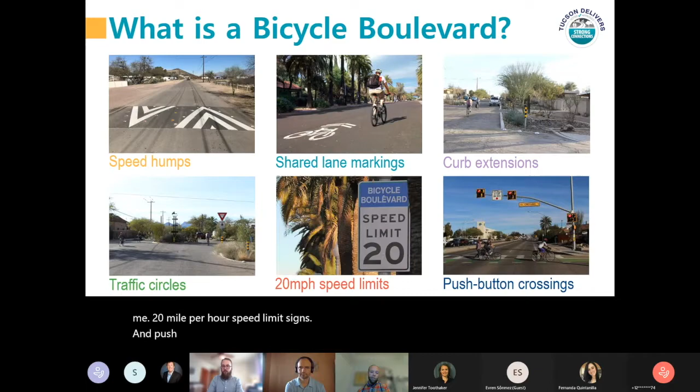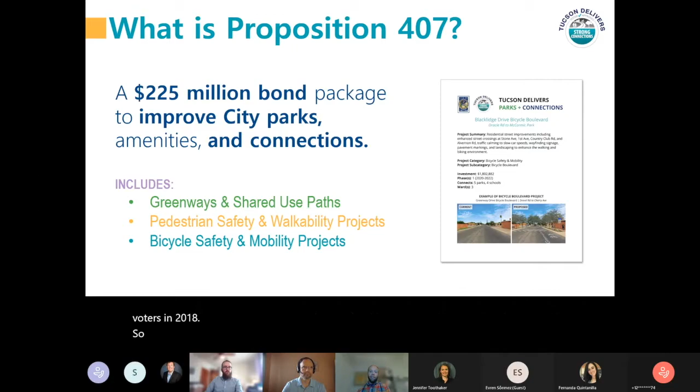Proposition 407 is the funding mechanism for this project, and it was a bond approved by voters in 2018. So that's what's making this project possible from a financial standpoint.

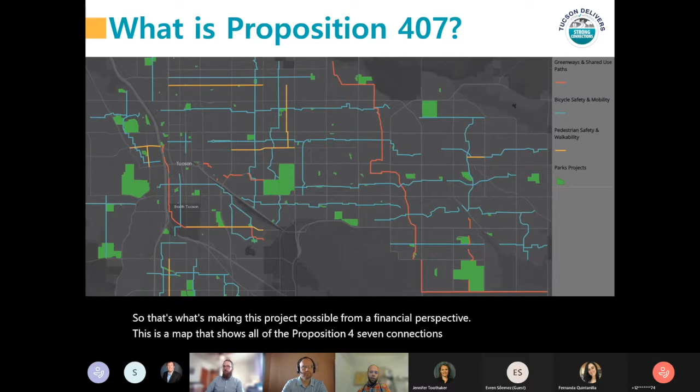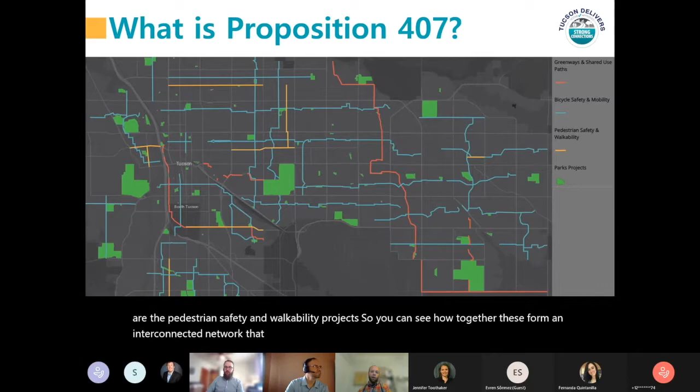This is a map that shows all of the Proposition 407 connections projects. All the blue lines are the bicycle safety and mobility projects. The orangish red lines are the greenways and shared use path, and the yellowish orange lines are the pedestrian safety and walkability projects. So you can see how together these form an interconnected network that is going to help people get across town and access destinations.

Got a lot of comments as well about the pavement quality, some comments about cut-through traffic, and then other ones about trees, flooding, sidewalks, litter, and crime. Those were less common, but still a good number of folks had some concerns about those issues as well.

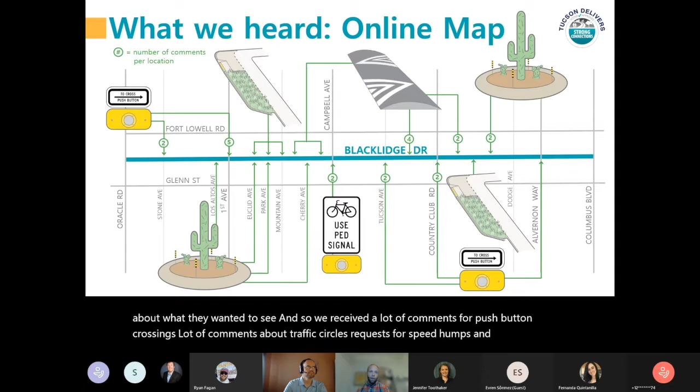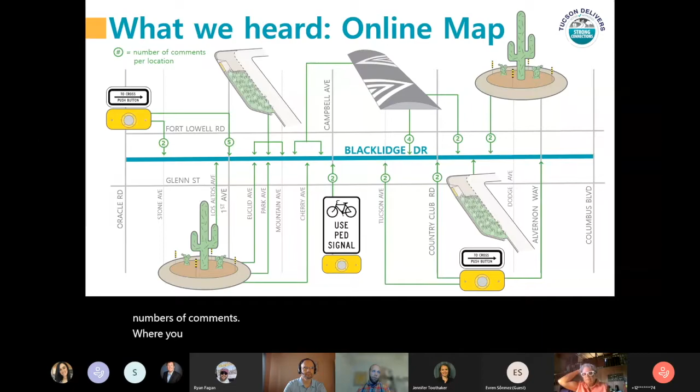The numbers that you see inside the little circles on this slide are the numbers of comments - for example, there's a request for a push button crossing at First Avenue, 5 different people suggested that would be something they'd like to see. So that's what those numbers mean.

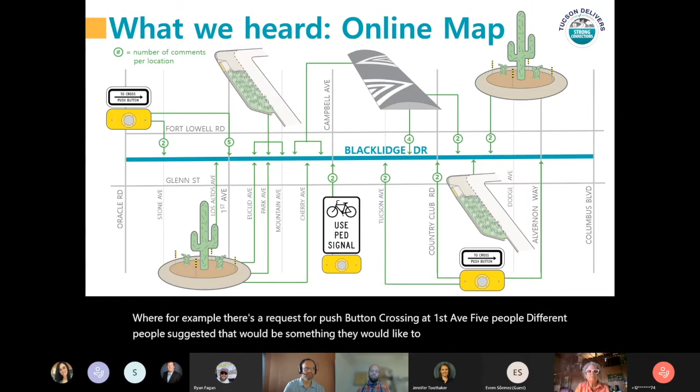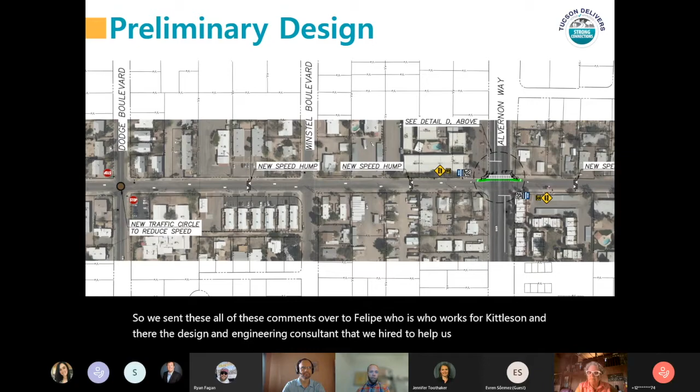So we sent all of these comments over to Felipe, who works for Kittelson, the design and engineering consultant we hired to help us design this project. He and his team reviewed all of your comments and came up with a preliminary design to incorporate what we heard from you all.

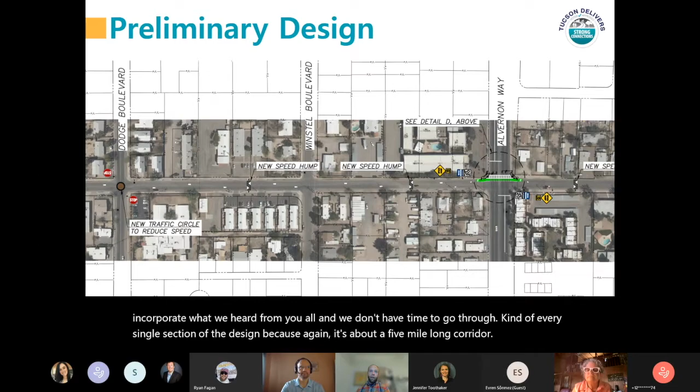We don't have time to go through every single section of the design, since it's about a 5-mile long corridor. But this is available on the website, so I encourage you to go download it. There's a slide later about how to access the website, but if you just Google Blacklidge Bicycle Boulevard, you'll find it.

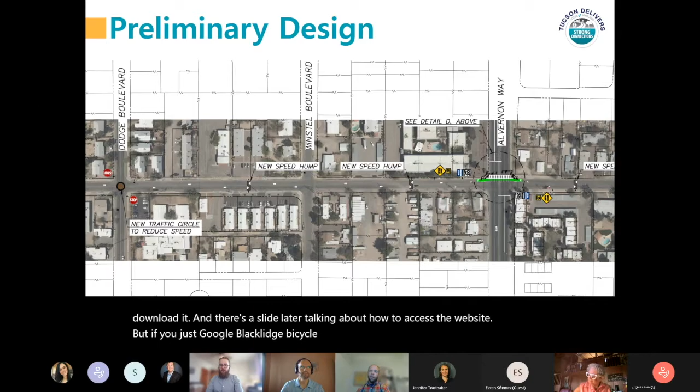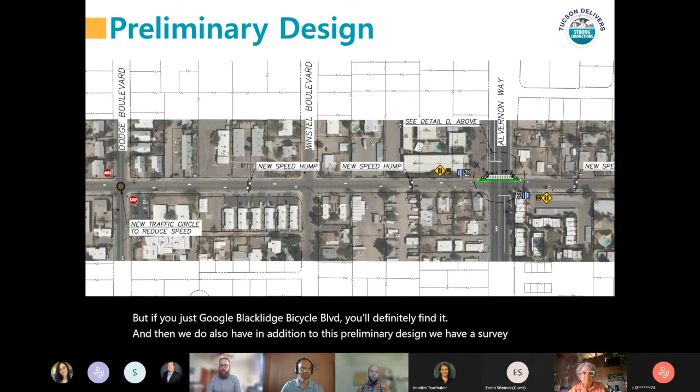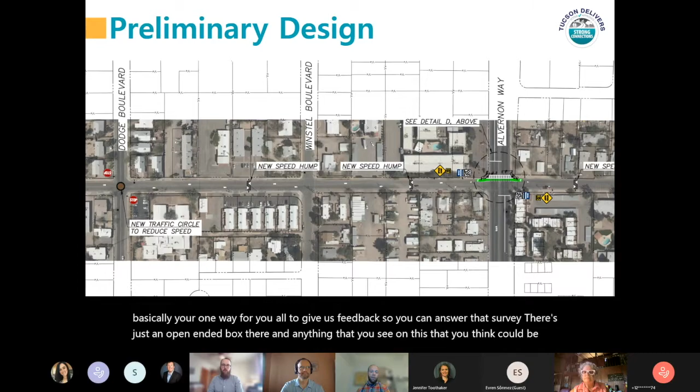In addition to this preliminary design, we also have a survey as one way for you all to give us feedback. There's an open-ended box, and anything you see that you think could be changed to work better, let us know. You can also call me or email me. I'm around, and I'd love to have conversations with you about what you'd like to see along the corridor.

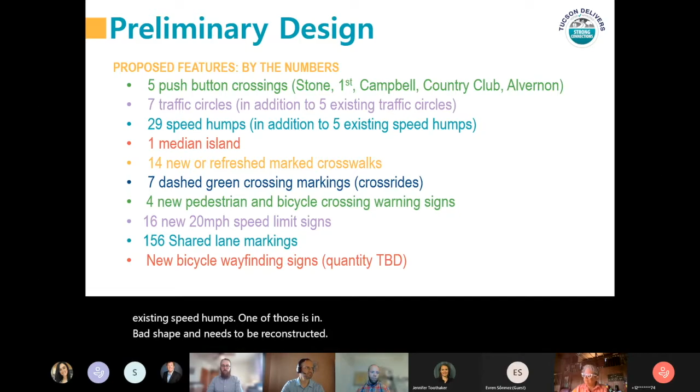Since we can't go through everything bit by bit, I'll summarize some features here. There are 5 push-button crossings at Stone, First Avenue, Campbell, Country Club, and Alvernon. There are 7 proposed traffic circles in addition to 5 existing ones, and 29 speed humps being proposed in addition to 5 existing ones. One of those existing humps is in bad shape and needs to be reconstructed.

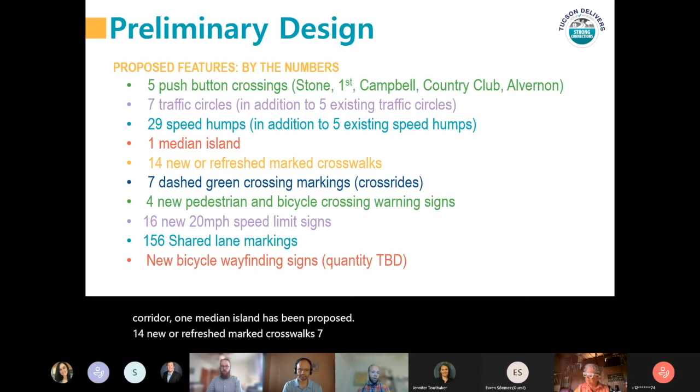One median island has been proposed, along with 14 new or refreshed marked crosswalks, and 7 dashed green crossing markings, or cross rides as they're sometimes called. There will also be 4 new pedestrian bicycle crossing warning signs, 16 20-mile-an-hour speed limit signs, 156 shared lane markings, and bicycle wayfinding signs. We don't know how many of those there'll be yet, since that comes later, but it's part of the design.

I wanted to share with you a couple of options for Blacklidge at First Avenue. This is one of the locations where we're considering experimenting with a new treatment that we think has the possibility to work a little better than what we've done in the past, although we want to get your feedback.

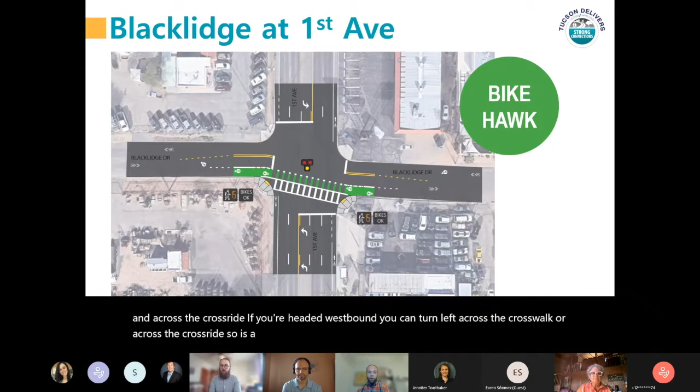I want to point out there are no turning restrictions on vehicle movements in this option. Cars can drive straight through on Blacklidge. If headed eastbound, you can turn right across the crosswalk and cross ride. If headed westbound, you can turn left across the crosswalk or cross ride. So it's a bit more convenient, arguably, for cars, but there are some conflicts with turning vehicles and people walking and biking in this option.

The second option is what we're calling a mini toucan. This is similar to a toucan design the city of Tucson has installed in other locations, including 5th and Euclid, if you're familiar with that. It's very similar, except instead of a short section of 2-way bike lane, it's just a 1-way bike lane. But in this option, bikes don't have to cross over to one side of the street.

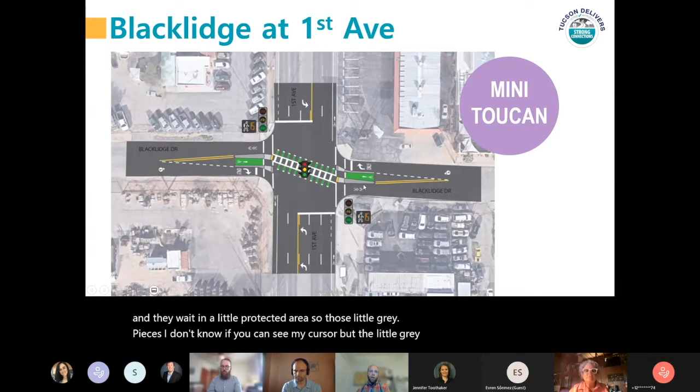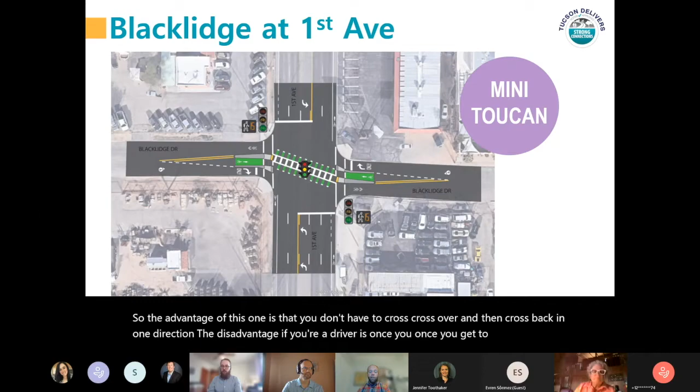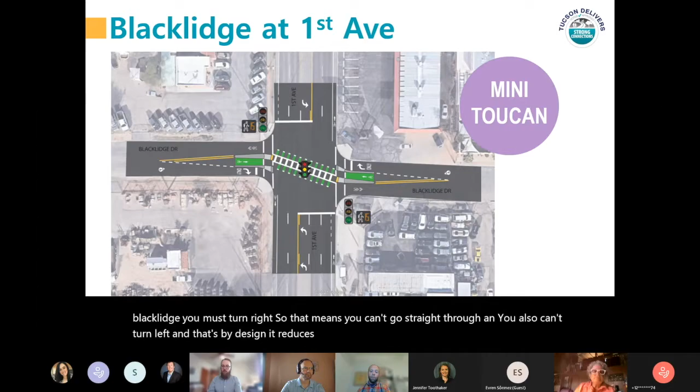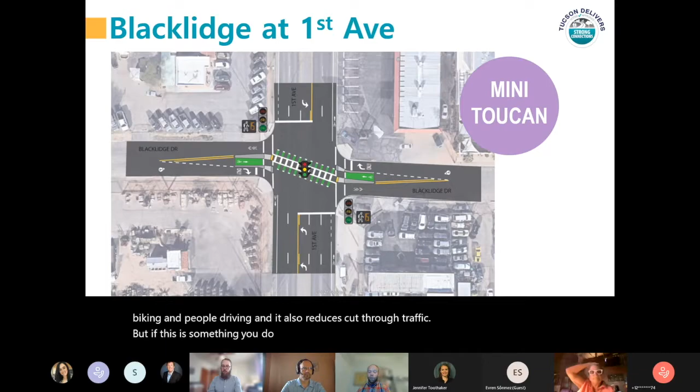The advantage of this one is that you don't have to cross over and then cross back in one direction. The disadvantage, if you're a driver, is once you get to First Avenue on Blacklidge, you must turn right. You can't go straight through, and you also can't turn left. And that's by design. It reduces the conflicts between people walking, biking, and driving, and it also reduces cut-through traffic. But if this is something you do frequently, you may not love this option.

Okay, I'm going to pause there because I just talked for a long time. I'm hoping that we can get a sense of what people prefer here. In a minute, I'm going to ask you to raise your hand for one of the options, but I wanted to stop and see if anybody had any questions before we take the poll.

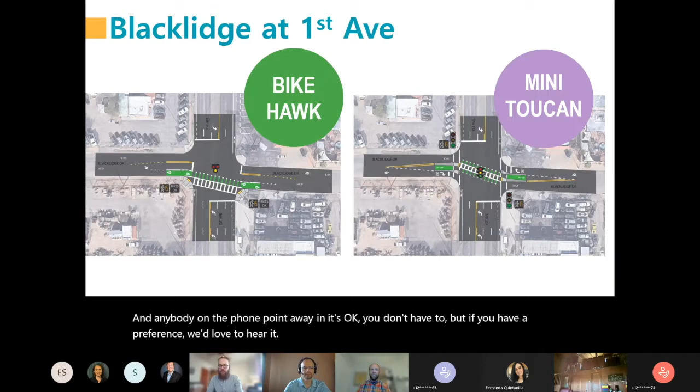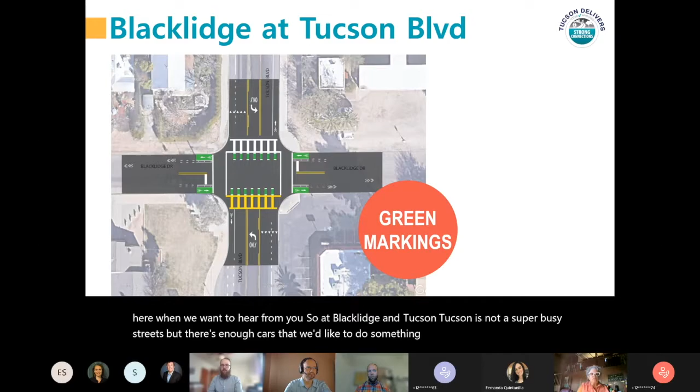All right, let's move on to the next intersection. There's only two of these, two intersections. One, instead of having two options, has three options. I just wanted to walk you through them quickly because we're not sure what's going to work best here, and we want to hear from you. So at Blacklidge and Tucson Boulevard, Tucson is not a super busy street, but there's enough cars that we'd like to do something more than just have a stop sign there. So we have three options. The first one is a short section of bike lane and green crossing markings, and this just alerts drivers to the fact that this is a bike crossing and that they should expect bikes.

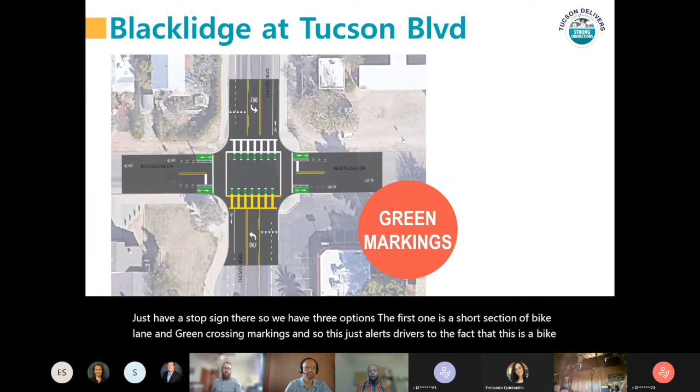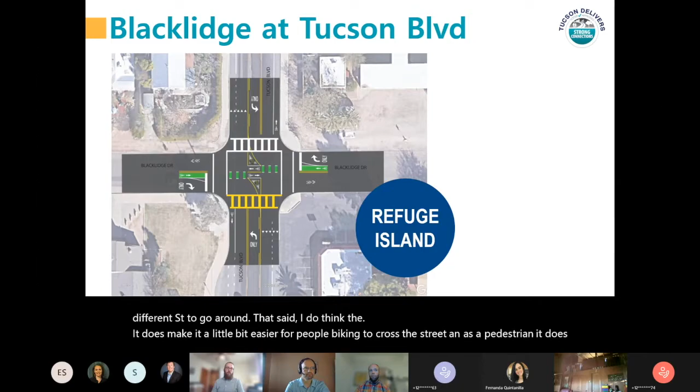I do want to point out, if you're driving here, similar to the mini Toucan option at First Avenue and Blacklidge, you would have to turn right here as a driver. You can't go through and you can't turn left, so that might be a disadvantage. We did hear from some folks at the in-person event that they drive this daily, and it would be a little inconvenient for them to have to turn and use a different street to go around. That said, I do think it makes it a little easier for people biking to cross the street, and as a pedestrian it does give you a little bit of a refuge as well. So that's the second option.

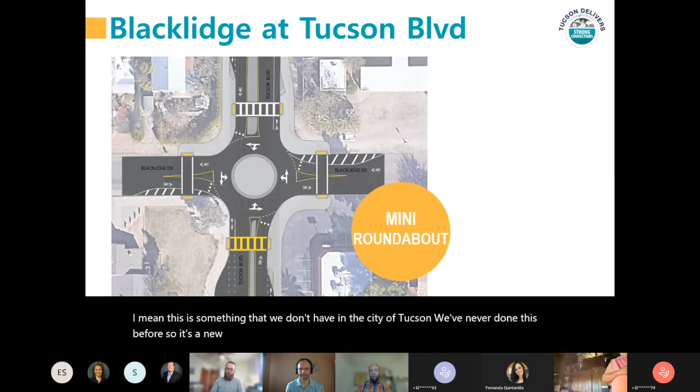The third option kind of surprised us, to be honest — at the in-person event, this was by far the most popular option. This is something we don't have in the city of Tucson; we've never done this before, so it's a new idea. It's bigger than the traffic circles you may have seen on other streets, and it really functions like a true roundabout, just about half the size of a conventional one.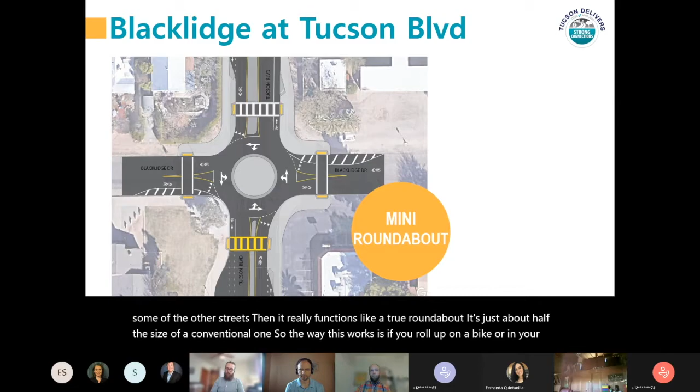The way this works is, if you roll up on a bike or in your car, you have to yield to people already in the roundabout. If you're in that circular area, you get to go, and if you're not in the circular area yet, you have to wait. This will slow people down — it has a design speed of about 15 miles an hour, so there will be warning signs that say slow down to 15 miles an hour, and the geometric design really encourages people to do that as well.

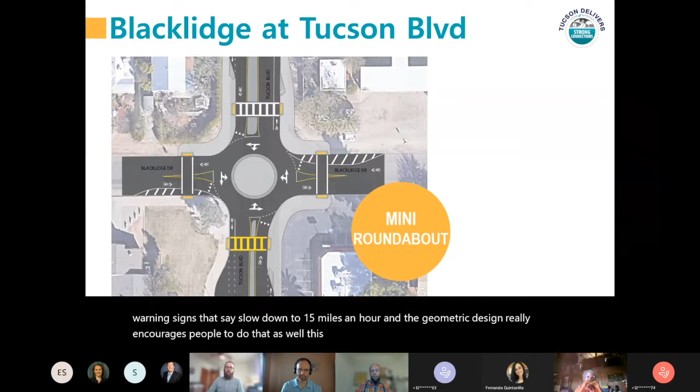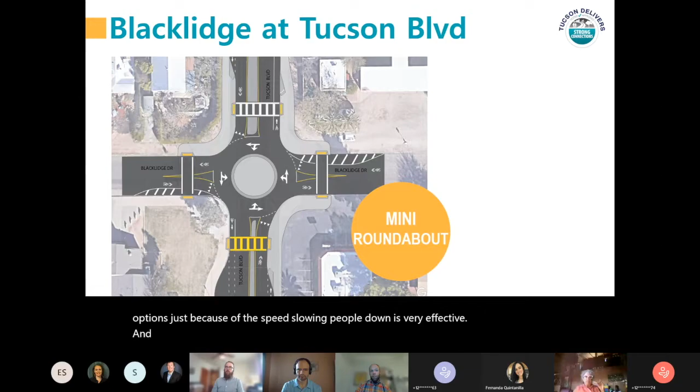This has probably the biggest safety benefits of all the options, just because of the speed. Slowing people down is very effective, and it really does reduce crashes for all modes. The crosswalks for pedestrians are set back, meaning you have to walk a little further out of your way, but having them set back like that is a big safety benefit.

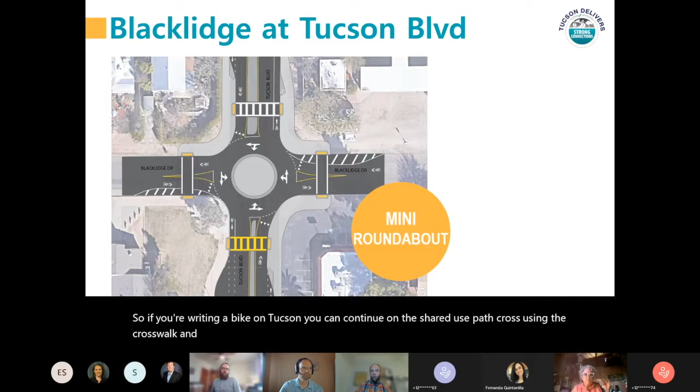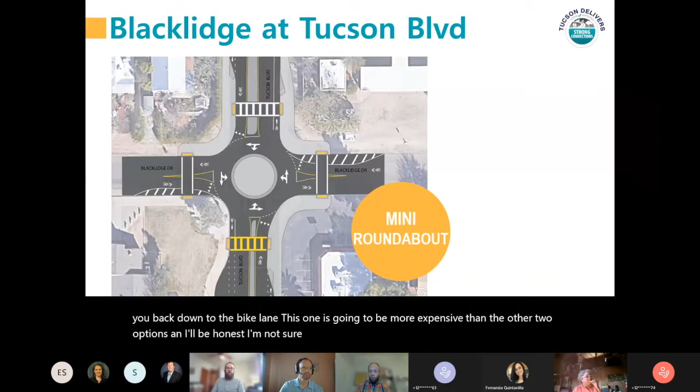You'll notice too that the bike lanes on Tucson Boulevard have some little ramps that take you up onto a shared use path. So if you're riding a bike on Tucson, you can continue on the shared use path, cross using the crosswalk, and then continue, with another little ramp on the other side that takes you back down to the bike lane. This option is going to be more expensive than the other two. I'll be honest, I'm not sure if we can afford to construct this, but we really just wanted to put it out here and see if people liked the idea before we took it any further.

All right, so these are the three options. Are there any questions about the green marking option, the refuge island option, or the mini roundabout option before we take a quick poll? I'll take that as a no. Ryan, are there any questions in the chat box? There are not, at this time.

All right, if you like the green markings option, which is the first one I showed, raise your virtual hand now if that's your favorite. Feel free to unmute and chime in on the phone too. Ryan, how many do we have for that? We do not have any hands raised. No votes. All right.

What about the refuge island option? That was the second one, with the little triangular islands where cars have to turn right, but bikes have a little place to wait. I'll vote for that one. Okay, one vote for refuge island.

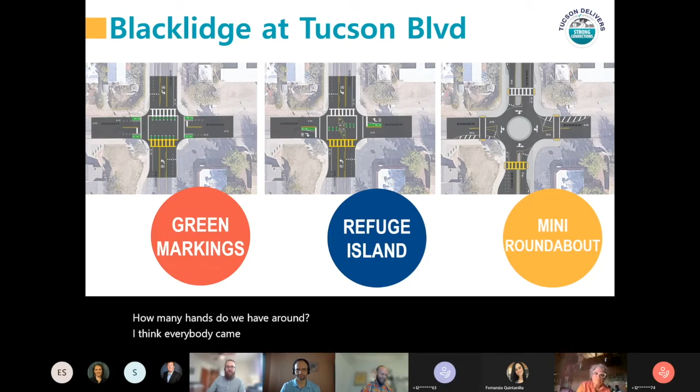Okay, last one: the mini roundabout. Anybody want to vote for that one?

Any hands, Ryan? Yes, we have two hands raised. All right, look at that. Mini roundabout wins again.

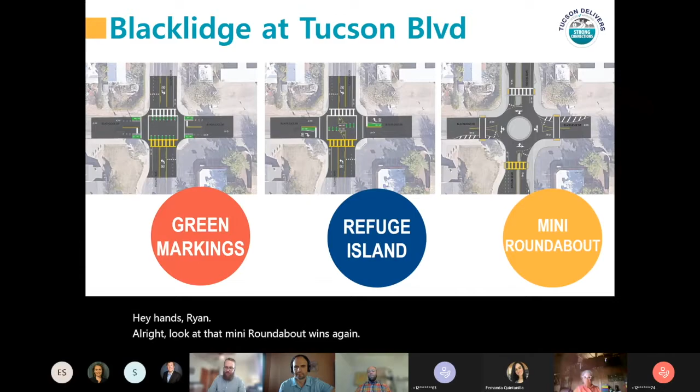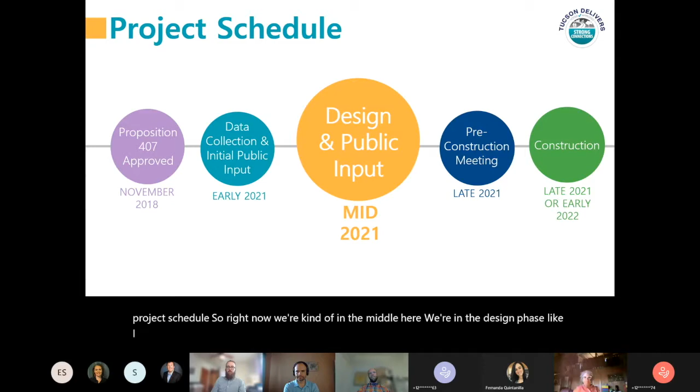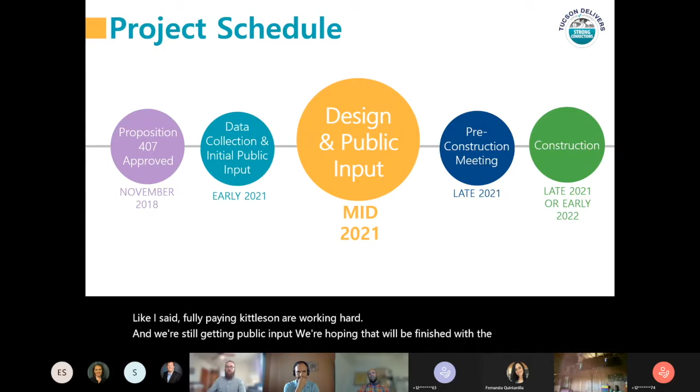Very cool. Okay, I'm almost done with this presentation. I just wanted to give an update on the project schedule. Right now we're kind of in the middle, in the design phase. Felipe and Kittelson are working hard, and we're still getting public input. We're hoping to finish the design towards the end of the year, and we hope to go to construction in late 2021 or maybe early 2022.

On the website now, I just updated it today, and I put the preliminary design plans that Kittelson developed and that we took to the public meeting that was in person. The intersection concepts are on there, and we have the survey on there as well.

So if there's things that you see on the preliminary design that you'd like us to modify, or if you have an idea for a different solution, please let us know in the survey, or again, you can give me a call or you can email me.

All right, so that's it for the presentation. I'm going to stop sharing my screen, and I would love to hear your questions at this time.

Ryan, do we want to start with anything in the chat box? Do we have any questions in the chat box so far? At this time, we don't have any questions in the chat box. Okay. Well, in that case, we'll just open it up. Feel free to unmute yourself. If you called in on the phone, you want to ask a question or you want to give us some feedback, feel free to do that now.

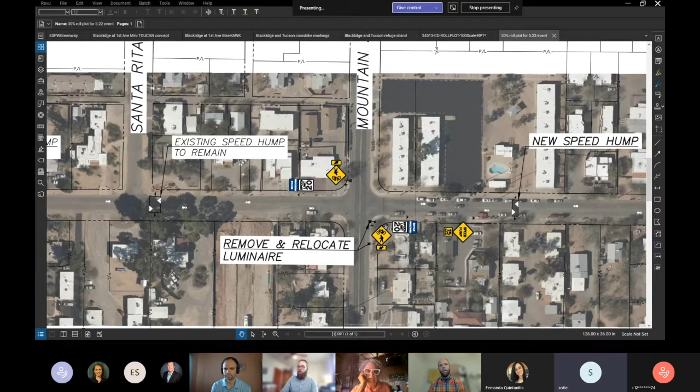Oh, you were called in on the phone though, right? Are you on the phone or did you join on the computer? I'm on my phone, but I can see it. Oh, you can see it though. Okay, cool.

Yeah, so this is what that intersection looks like. And these are the crossing warning signs that I was talking about. They have a little bike icon and a pedestrian and a little downward facing arrow.

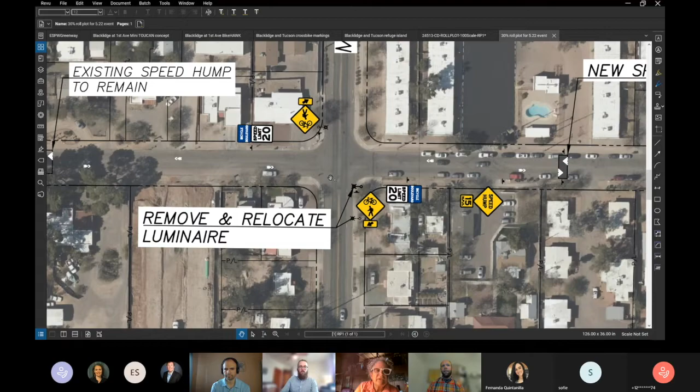So that's kind of what we're thinking here. We thought about trying to do curb extensions, which would shorten the crossing distance and maybe slow people down a little bit. The problem is if we did a curb extension, that would reduce or eliminate the bike lane, and we didn't want to do that because we know it's a bike way. There's not any space to do, for example, a refuge island in the middle like we talked about at Tucson Boulevard. And we weren't sure that a traffic circle was the right solution. So that's what it looks like right now.

I'm going to let Felipe. I have a comment about that solution. I live in that area, and if you're driving your car on Blacklidge and you're crossing Mountain, those are the people that need the warning signs, not the people driving on Mountain. If you do not stop before the stop sign, you really run the danger of hitting a cyclist coming down Mountain. So I don't know.

You can't see my cursor, can you? No, no, I can't. I'm sorry.

So what you want is some kind of warning for the people driving both directions on Blacklidge to be aware of bicycles in the bike route on Mountain. You can put them on all four corners if you want, but if you only can do two, it's much more important for the drivers on Blacklidge than for the drivers on Mountain. It's also important for drivers on Mountain in terms of making right-hand turns into cyclists if they're not paying attention. But because I live, drive, walk, and bike in that area, and have for decades, I really see you needing to address the car traffic going both directions on Blacklidge that are crossing Mountain.

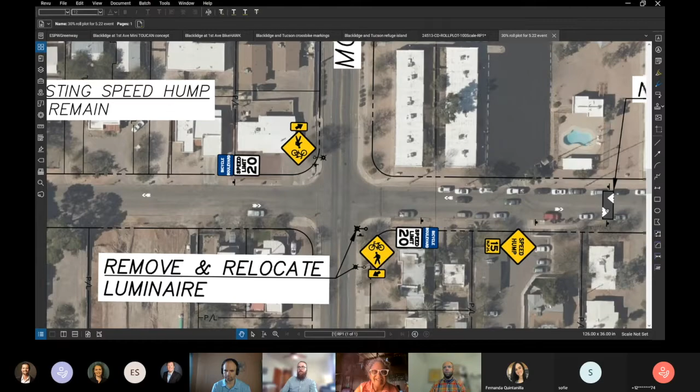I have a question on this screen you have up right now. Do I see a new speed hump going in on Blacklidge east of Mountain? You do, a proposed one. Right here. Well, actually, the sign. Oh, I see, that's the warning sign. Yeah, that's a great idea. Okay, good idea, because we've got speed humps between Mountain and Park.

And then you've got Park to Modern, which is a whole other problem. But there aren't any speed humps on Blacklidge to the east of Mountain, so I love that idea.

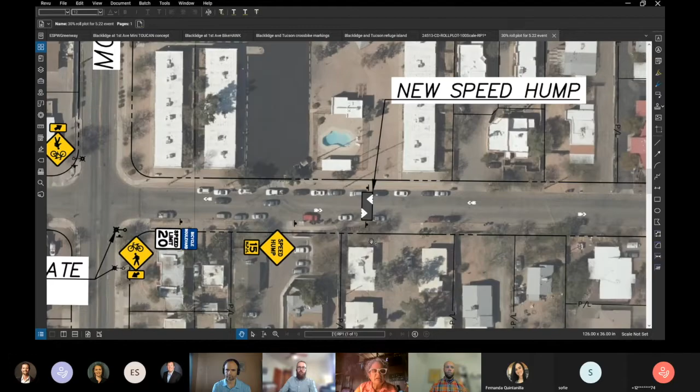One of the things I brought up at an earlier meeting, maybe the first one, was, can you scroll this and show down at Blacklidge and Park? Yeah, I can show wherever you want to go. Let's look at Blacklidge and Park for a second. Here you go. Oh right, so you're going to- good, this is good, there's a speed hump.

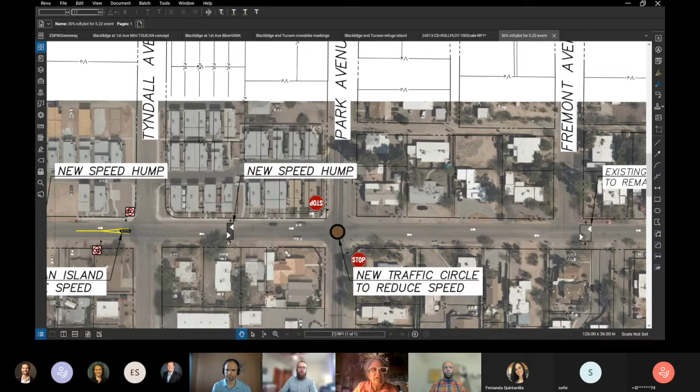Is that stop sign an existing stop sign, right? Wait a minute, no it isn't. Huh, the stop is currently on Blacklidge. Are you putting in a traffic circle? Ooh, that's a great idea there. That's a big accident area in terms of cars, maybe not with bicycles.

So does that mean that would be a 4-way stop at that intersection, Blacklidge and Park? What we're proposing right now is a 2-way stop. Well, right now it's a 2-way stop, but the stops are on Blacklidge and Park just zooms through. I see your stop signs are on Park. Yeah, and that's intentional.

And I should say the stop control proposed here is pretty preliminary. Our traffic engineers haven't reviewed in detail yet all of the stop sign locations. But the intent here is that when you have a bicycle boulevard, you're trying to make it more convenient for the people. Exactly, that's what I'm seeing.

What you're doing is right now, the bikes and cars have to stop on Blacklidge, but you're making it easier for bikes to get through that intersection with the traffic circle, and with stopping traffic on Park, which I think is a great idea because as fast as people drive on Blacklidge, they drive much faster on Park, and they don't have a stop there.

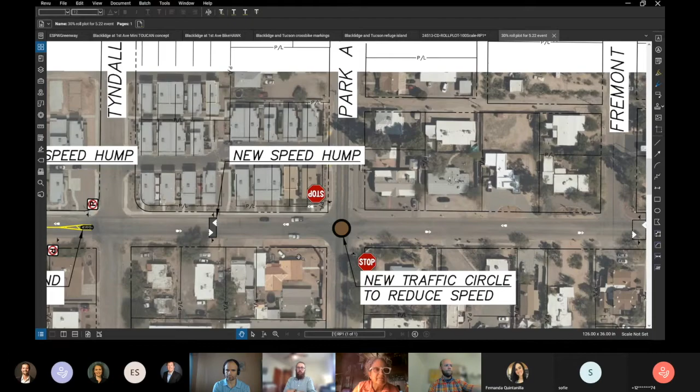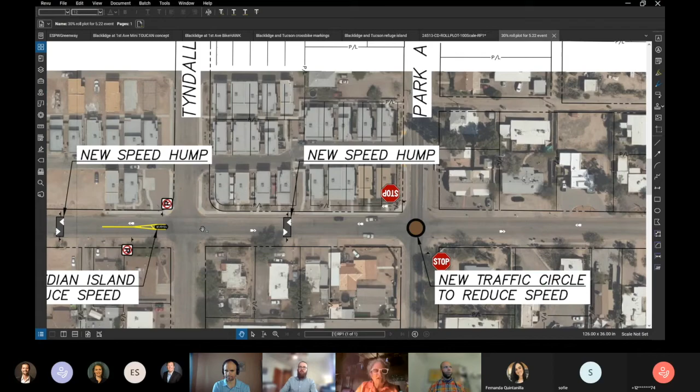One thing about this area between Park and Tyndall, which doesn't show on your picture, is that I've been in the neighborhood over 30 years, so I've watched a lot of things change. When Park Modern was built on Blacklidge between Tyndall and Park, there were lots of meetings with the neighborhood association, and a lot of assurance that everybody would be parking off the street because everybody has a 2-car garage on the back side of their building.

And what we have seen, contrary to this picture you have here, is a lot of traffic parked along the curb on both sides of Blacklidge in this area, to the point where sometimes it's almost impossible to get 2 cars in traffic through between them. And I think that poses a real problem for people on bicycles, and I don't know that there's anything you can do about that.

I don't know if people are just using their garages for storage or it's too inconvenient to enter through the back door, but the promise that there wouldn't be people parking on the street did not come to be.

Gotcha. Yeah, that's not the first time I've heard that. I think in theory, on-street parking can be a good thing for a bicycle boulevard, because if there's cars parked on the street, that narrows up the travel lanes, slows things down, and introduces a little bit of friction. But yeah, that's a tricky one. Aside from removing the parking, which I think would be a very difficult sell, I don't know how you solve that problem.

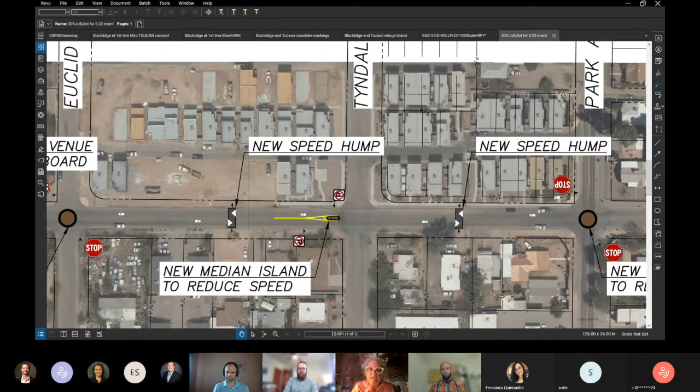The last time I went down there, I noticed that speed hump is completely gone now. Oh, really? It was scraped away. But that's not a street we're dealing with right now. But I understand the whole thing about the water drainage.

Right. There are some streets in Tucson that have what they call an inverse crown, and that's one solution to deal with the drainage there. Well, Blacklidge, I know in that area is not an inverse crown because we've got one of those cutaways in the curb that waters vegetation, that sort of thing going on because the water tends to roll down at the curbs.

There might be other questions, but I did want to just quickly go back to the Mountain Avenue question in terms of what's happening there. Ryan just interjected and sent me a chat suggesting that it might be possible there. We may have enough width that we may be able to narrow the travel lanes a little bit at the intersection and maybe do a median refuge island. So I don't know, that might be something we could look at, because I would like to do something more at Mountain than just the warning signage. And I see Felipe nodding, so I don't know if he has thoughts on that.